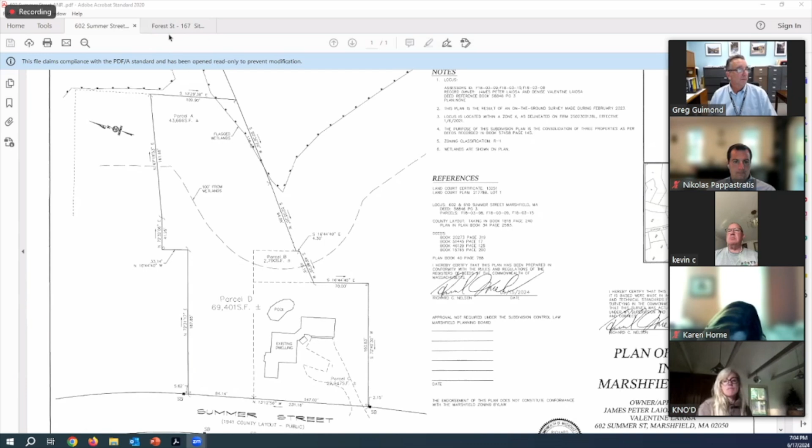Thanks, Greg. Any discussion from the board? I'm good. Anything from the public for this? Seeing none, I'm going to make a motion that we approve the A&R plan as presented for 602 Summer Street. Is there a second? Second, Katie O'Donnell. Katie O'Donnell, aye. Nick? Nick Pappastratis, aye. Kevin? Kevin Cantwell, aye. And Mike Viviano, aye.

Okay, that one's all set. And it is 7:05, so you can open the public hearing on the special permit for the solar panel carports at Furnace Brook Middle School.

Any minutes to approve at all? No. Okay, so I'll make a motion that we open the public hearing for a special permit for the install of the solar panels at Furnace Brook Middle School and waive the reading of the notice. Is there a second? Second, Katie O'Donnell, aye. Nick Pappastratis, aye. Kevin Cantwell, aye. And we're going to have our associate member vote on this one. Scott DeCastro, aye. And Mike Viviano, aye.

Okay, who's here for this? Nathan is. Good evening, members of the board. My name is Nathan Collins. I'm Director of Engineering for NextGrid. Just going to share my screen real quick.

Okay, ever see that site plan? We do.

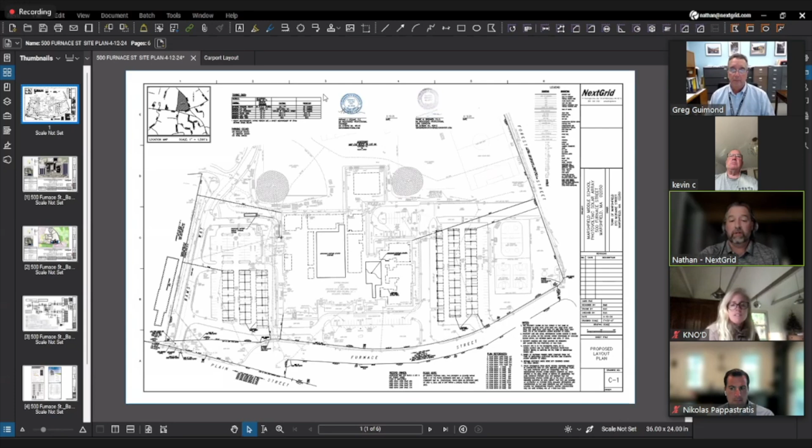The carports as proposed meet all dimensional regulations of the R1 district, including front, side, and rear setbacks. They will have no impact on vehicular or pedestrian access. The small circles represent column supports for the carports, located directly in the center of the parking striping, so there's no impact to parking counts or access aisle restrictions.

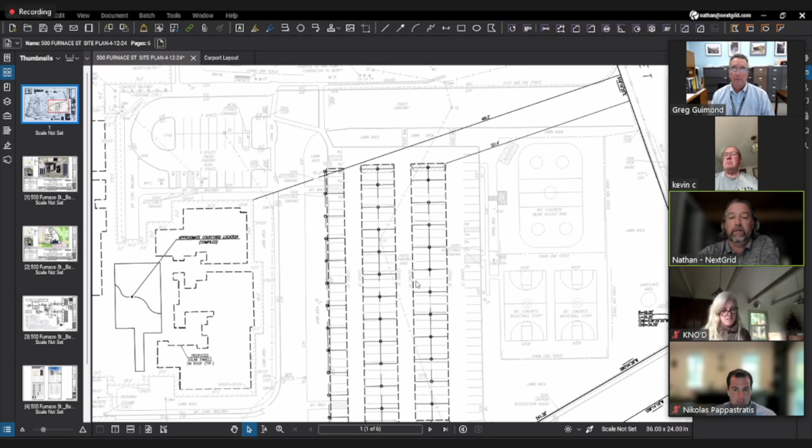We provided single line diagrams as well as this proposed site plan for the project. I'm happy to go into more detail on any questions you may have, but that's a summary of our proposed project.

We did not receive any comments from DPW, except Pat Brennan had one question: what do the panels or carport structures look like?

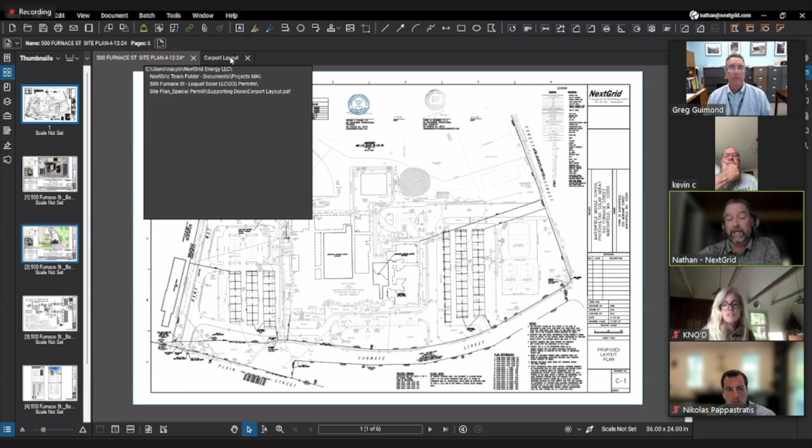We haven't finalized the design of these. We typically don't proceed with that until we get the non-ministerial permits from the local AHJ. To show an analogous project just constructed in Bridgewater - this is a typical design and layout of the carport array. We like to maintain a 14-foot height to the underside, which accommodates most AHJ ladder trucks for fire protection and access. We can go higher depending on consultation with the fire chief.

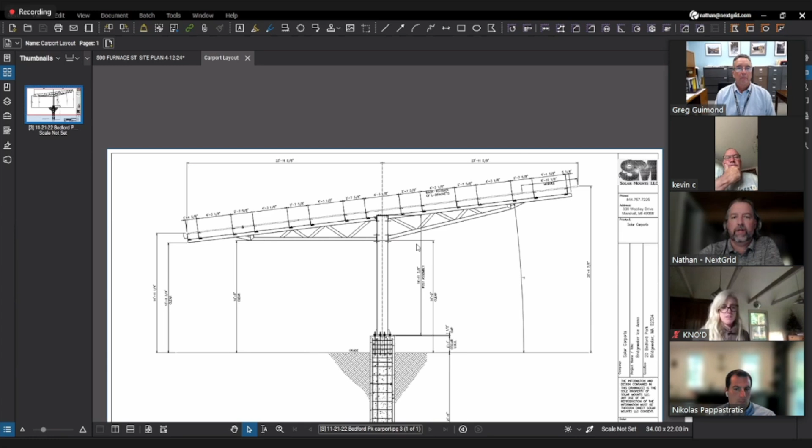Aesthetically, if you're familiar with the carports constructed at the police department, it's the same manufacturer and general layout. Let me share this screen to show the section through the carport.

This is the same project, the hockey rink in Bridgewater - this is the installed carport, showing the carport foundations. They're typically constructed with a sonotube, similar to a light pole foundation, with a bolted connection on top. These were mounted a bit higher, about 14.6 feet to the underside.

I did provide pictures of a typical ballasted roof system, even though it's not really part of this application.

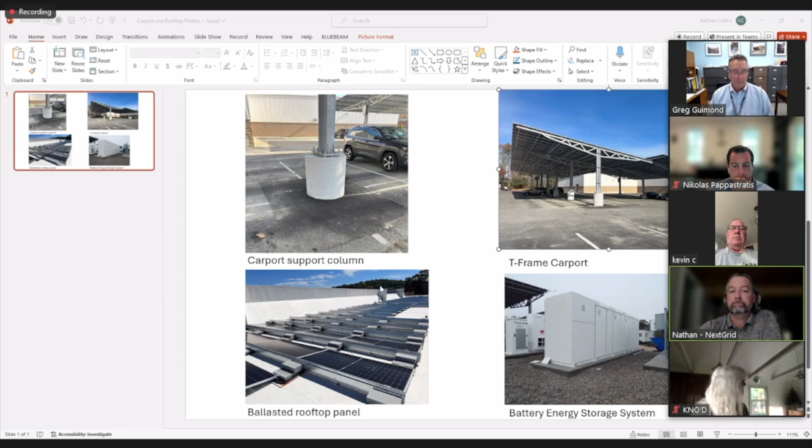I heard back from the town administrator - he asked the board, since this is a town-sponsored and town-owned site, to waive the $60,000 decommissioning fund that we had placed on the fairgrounds carport decision. He wished the board not place that condition on this project.

Any comments from the board? Yeah, I had a couple questions. That site section you shared looked like there might be a gutter system associated with this, or is that not something typically provided to deal with water runoff?

That's an optional system. Let me share the picture from Bridgewater again so I can talk to it. Let me see if I can make this bigger.

This is what we call a non-closed deck system. The horizontal supports are all stainless steel, and then they have what's called purlins - like C channels - and that's what the solar panels are mounted to. There are gaps between the panels, so stormwater will still flow vertically, just not as fast as if it was dumping rain directly. It does provide some protection from rain, but water still flows vertically, so these systems do not require a gutter system.

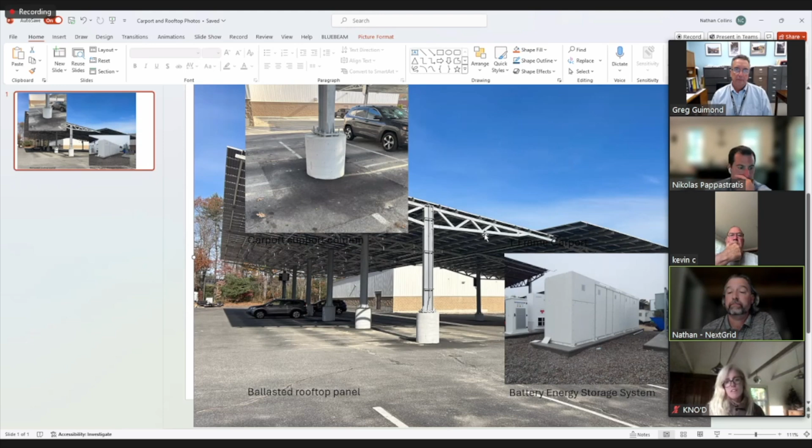That's my only question so far. Any other questions from the board?

Anyone here from the public for this? Greg, any issues moving forward now? No.

I'll make a motion that we approve the special permit to install the solar panels on the carports at Furnace Brook Middle School. Is there a second? Second. Katie O'Donnell, aye. Nick Pappastratis, aye, Fred's not here. Kevin Cantwell, aye. Scott DeCastro, aye. Mike Viviano, aye.

Thank you for your time. I'll have the decision ready for the next meeting, which is July 15th. Sounds good.

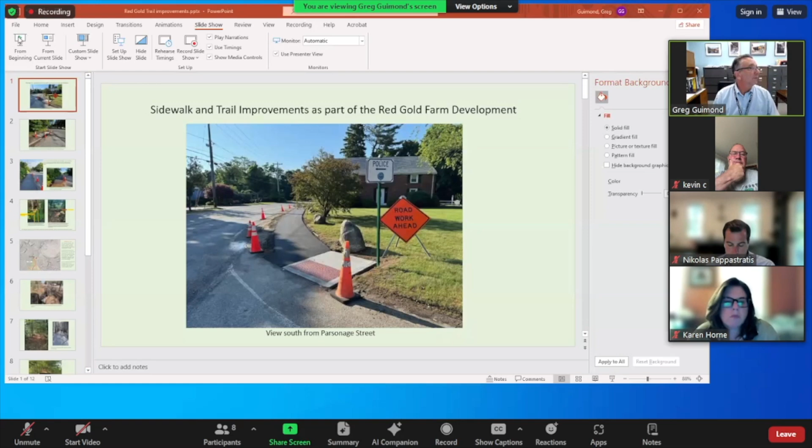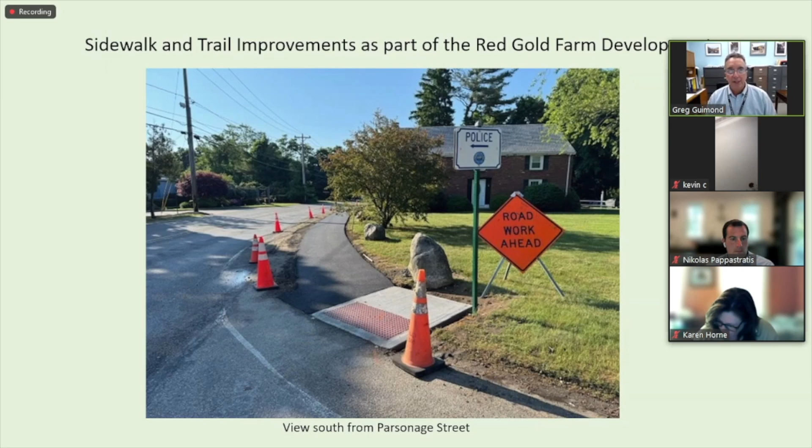We've been getting a lot of questions, so I just was going to do a little educational blurb on the sidewalk and trail improvements that are being done as part of the Red Gold Farm development.

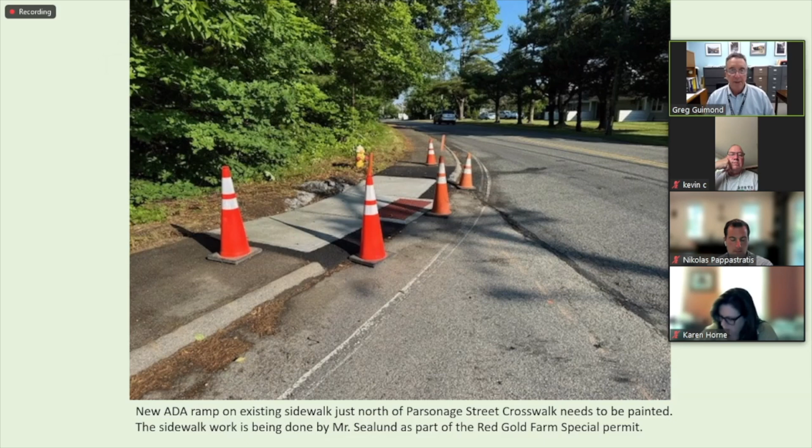Starting with the intersection of Parsonage Street and Webster Street on the north side, where there's an existing sidewalk, they've cut in new ADA correct ramps, and they are yet to put in the crosswalk that will be painted there.

The sidewalk runs, kind of meandering through a portion of it, and then another portion is right up against where a curb has been made. All the sidewalk work is being done by Kevin Sealund. It had been reviewed and approved and got permits from the DPW.

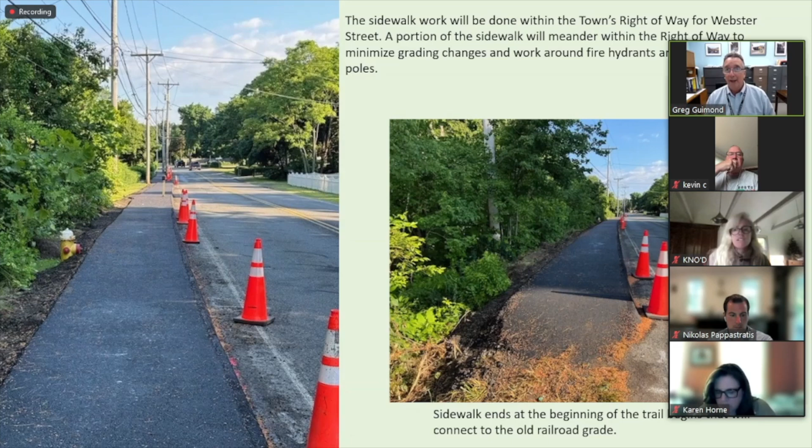A lot of people seem to be puzzled that the sidewalk just ends. Now it ends because we take a right, and we go down into the woods and we join up with the railroad grade. This low point will be filled in and graded by Kevin Sealund to match, so when you come off the sidewalk, you'll go smoothly down to the railroad grade. And then from the railroad grade, you would head south.

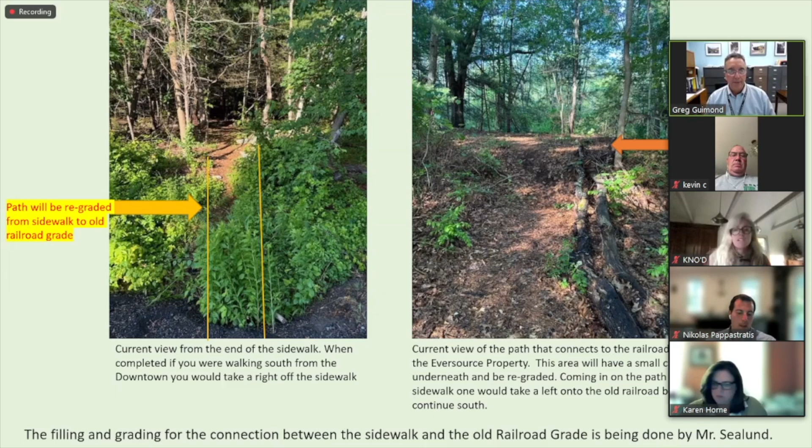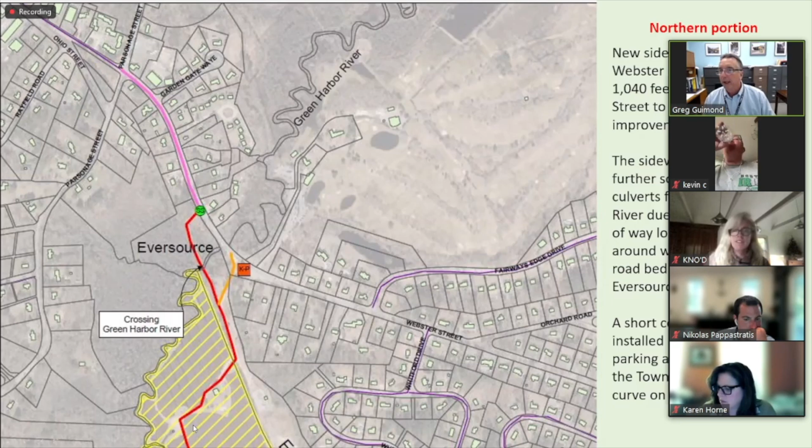Kevin Sealund will be installing a former ramp from Damon's Point over the Green Harbor River. You'll continue along on the railroad right of way on Eversource property until we get to the opening for the Garretts and Cranberry Bogs, and then it will run along the Cranberry Bog roads down and head past the Cranberry Bogs.

So in consultation with the DPW, et cetera, and Pat Brennan, the decision was made - let's go off-site trail. Pat had mentioned the Damon's Point ramp. We talked with Mike DeMeo and he provided us the ramp. Kevin will install that ramp, so that link will be made.

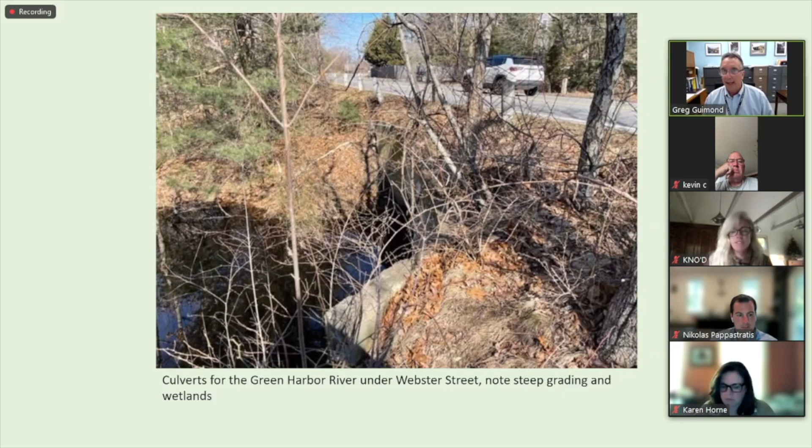You come down to where the bridge will be installed. On your right is the Garretts and Cranberry Bogs. To your left is the Webster Street area.

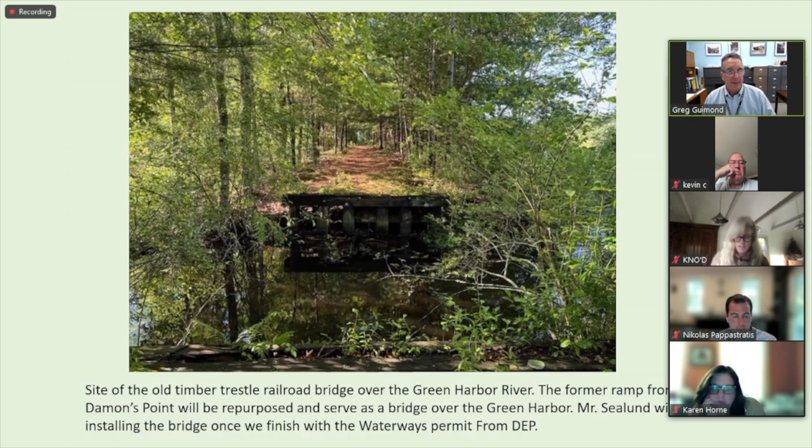This is the midsection, so we're coming down through here on the red trail, which is the main trail, an existing Cranberry access road. You'll have Cranberry Bogs on one side, wetlands on the other.

You come to the causeway, you cross back onto Eversource property where there'll be about a 460-foot walkway installed. And then we go onto a trail that'll lead us on to Steamboat Drive.

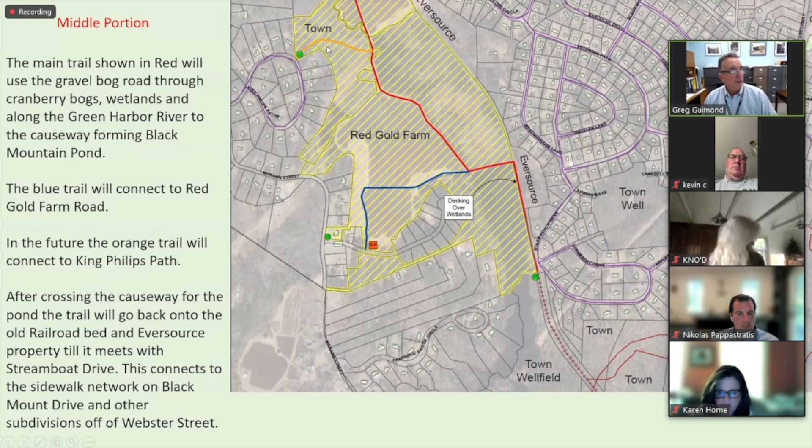The blue trail gives you access to the Red Gold Farm development. The orange trail is a future trail that will link into King Philips.

That gives you links into the old Pilgrim Trail and several trails coming out of Hoyt-Hall Wildlands Trust. The Old Pilgrim Trail will give you a connection over to the Daniel Webster property and then the Webster Wilderness and the Audubon Webster properties, to connect to existing sidewalks, which are shown in dark purple.

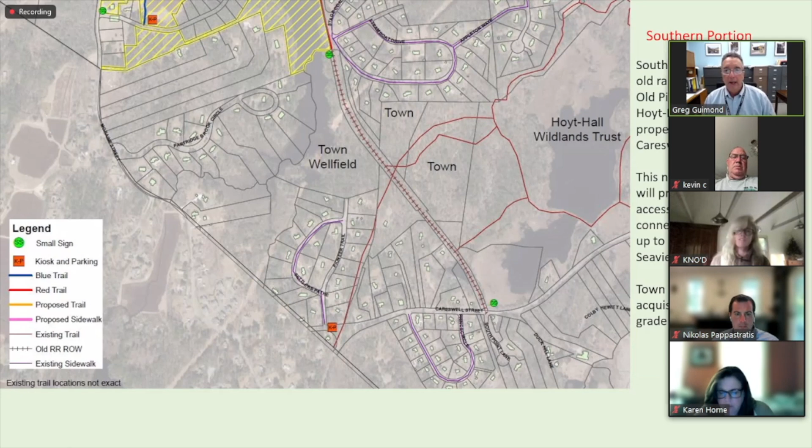That's pretty much it, just to give a background for the board in case the board members get any questions, and to give a little information to the residents so they understand what's going on.

Yeah, looks nice. Thank you, Greg. And that's it on our side. Okay.